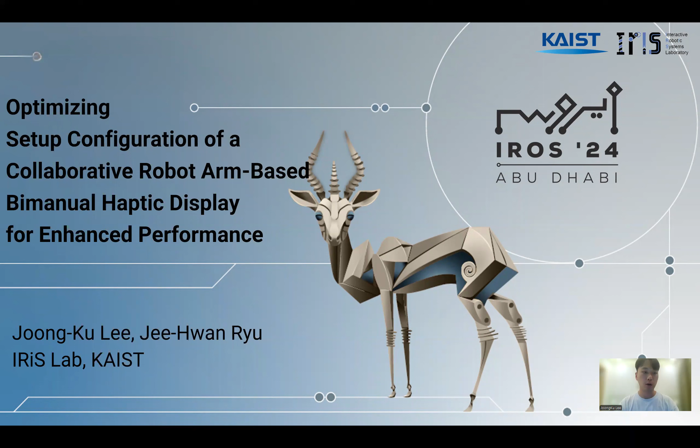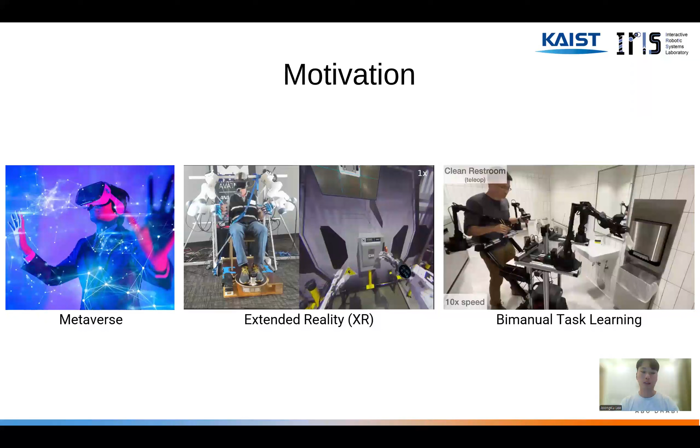Today, I will present a way to optimize setup configuration of a robot arm-based bimanual haptic display. Let me begin with the motivation of our research. The rapid advancement in metaverse and extended reality technologies have significantly increased the demand for sophisticated bimanual haptic displays, especially for applications like teleoperation, simulation, and learning of complex bimanual tasks.

However, despite this technological advancement, current commercial haptic displays exhibit several limitations to be utilized as a bimanual haptic display. Most of the commercial haptic displays are typically desktop systems with limited workspace and insufficient force and torque feedback range. Although there are some devices that can cover the entire human arm workspace, they often demand a nearly room-sized space with high cost and complexity of setup.

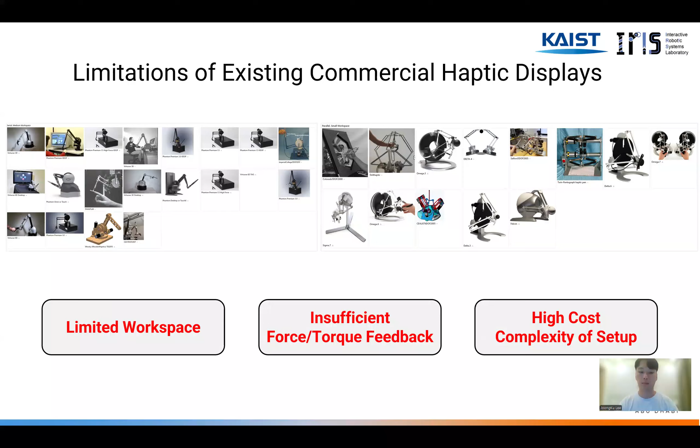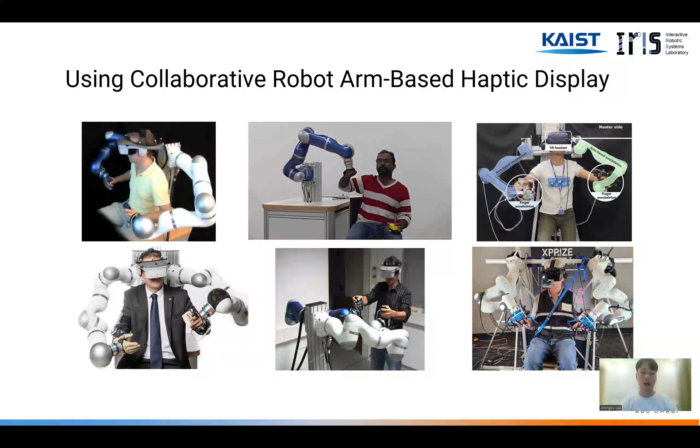In response to these limitations, previous researchers have explored the potential of using collaborative robot arms as a haptic display. However, the setup configuration for this robot arm is often determined empirically, relying heavily on trial and error or user intuition, rather than a systematic approach. As shown in this figure, the setup configuration can vary significantly, highlighting the need for a more structured and optimized solution. So several studies have attempted to address this challenge.

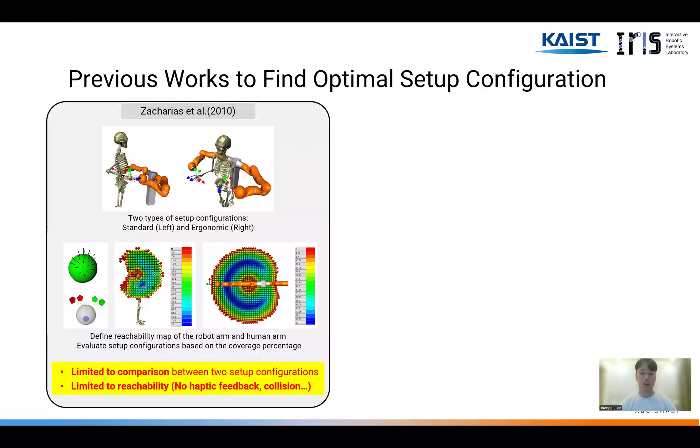Zacharias et al., for example, compared two configurations, a standard and an ergonomic setup, by defining reachability maps for both human and robot arms. However, their analysis was limited to just comparing two configurations and did not take into account critical factors such as haptic feedback or the potential for collision. Similarly, Lenz et al. focused on maximizing the overlap between human and robot arm workspace. But again, they did not account for haptic feedback performance or collision.

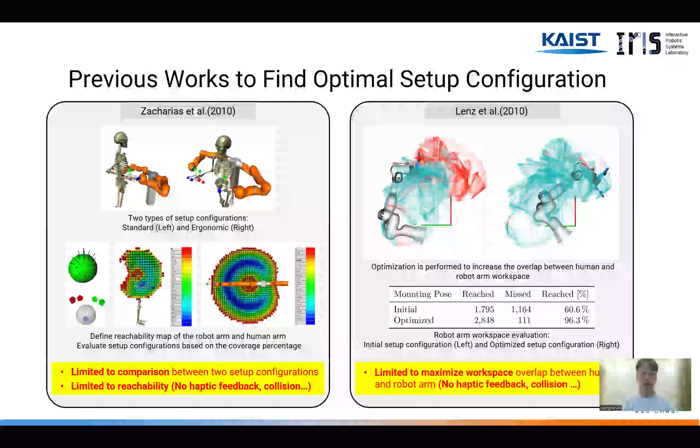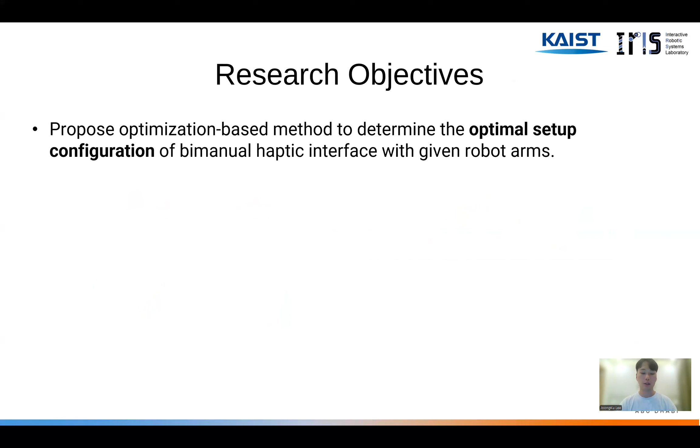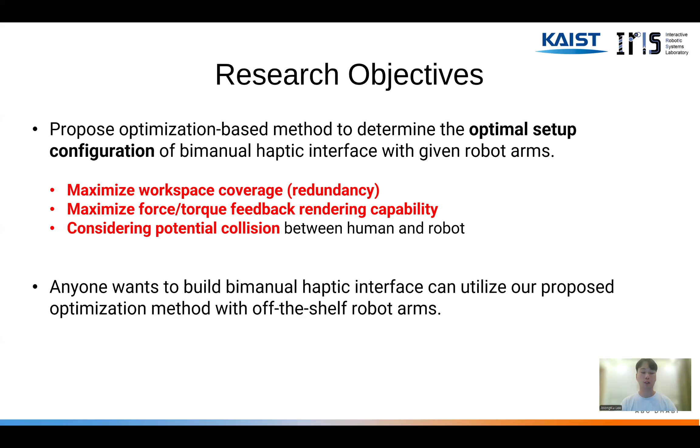So, our research aims to overcome previous studies' limitations by considering multiple factors that are essential for haptic interaction for determining the optimal setup configuration of the robot arms. This includes maximizing workspace coverage, redundancy if the robot arm is redundant, maximizing force and torque feedback rendering capability, and also considering potential collision between human and robot arm. Ultimately, we want this optimization method to be accessible and adaptable so that it can be applied to various off-the-shelf robot arms.

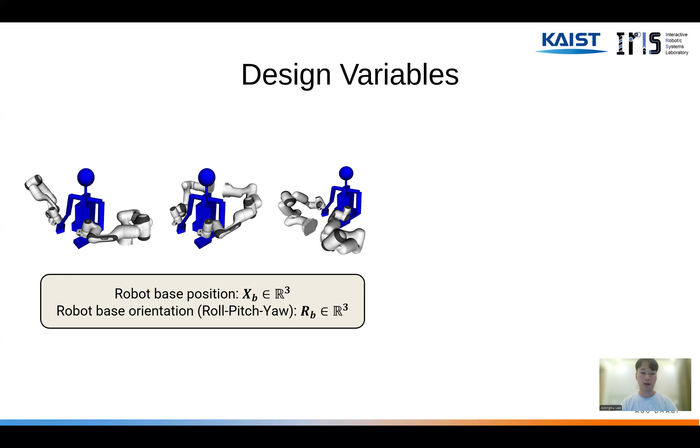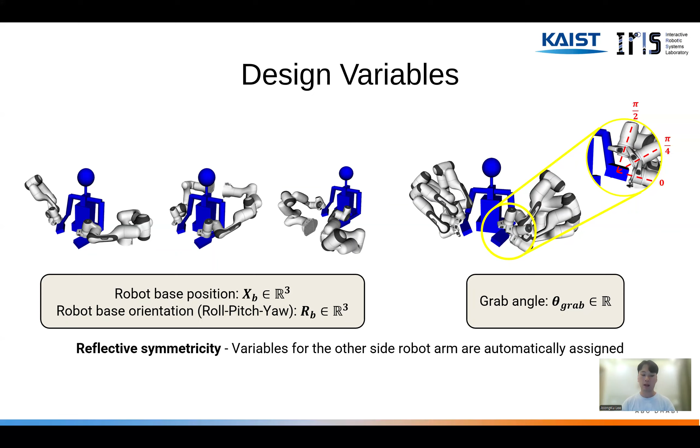Additionally, as depicted on the right side of the figure, various grab angles between the robot end effector and the human palm are possible. We assume that this grab angle also has a significant impact on the performance of the haptic display and included this grab angle as an additional design variable for our optimization. And to simplify the optimization, we assume reflective symmetry between the left and right robot arms, including their base positions and grab angles.

So, our optimization goal is set to find such a set of configurations that meets these four key requirements. First, maximizing workspace because we aim to cover the widest range of human reachable poses, allowing unrestricted manipulation movement without disturbing the operator. Second, ensuring dexterity because maintaining redundancy in the robot arm's movement is essential to support fluid, natural human movements.

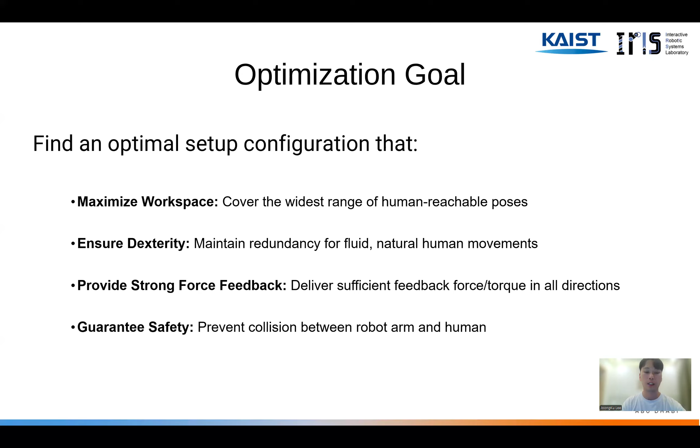Third, providing strong enough force feedback because the bimanual haptic display must deliver sufficient haptic feedback force and torque in all directions and under any circumstances to enable realistic haptic feedback. Last but not least, guaranteeing safety because it is essential to consider collision between the human and robot arms for optimization.

I will show you the overview of our optimization process. We begin with the workspace discretization, dividing the workspace into discrete positions and orientations to generate query poses. Next, we check the human arm workspace using inverse kinematics to determine the human reachable poses from these discretized query poses.

With this information, we move to the optimization phase, where we define a new set of configuration for the robot arms by adjusting the base positions, orientations, and grab angles. Then, we check the robot arm workspace to ensure the robot can reach to the human reachable poses.

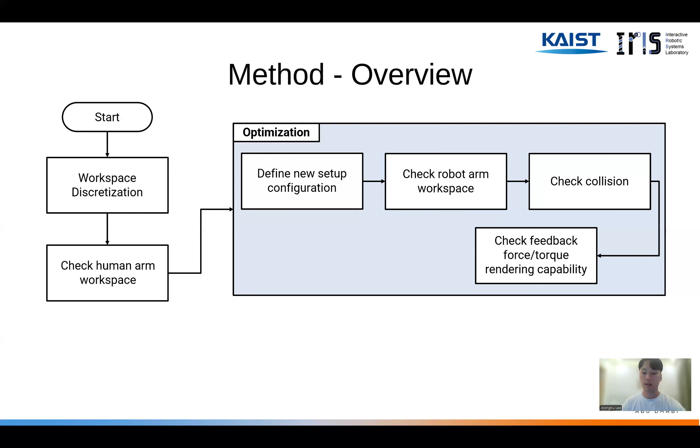We then perform collision checking to check the possible collision between the robot arms and the human operator. Afterward, we evaluate the feedback force and torque rendering capability to confirm the robot can deliver adequate haptic feedback. Finally, we calculate the objective function, balancing workspace coverage, redundancy, and haptic feedback performance.

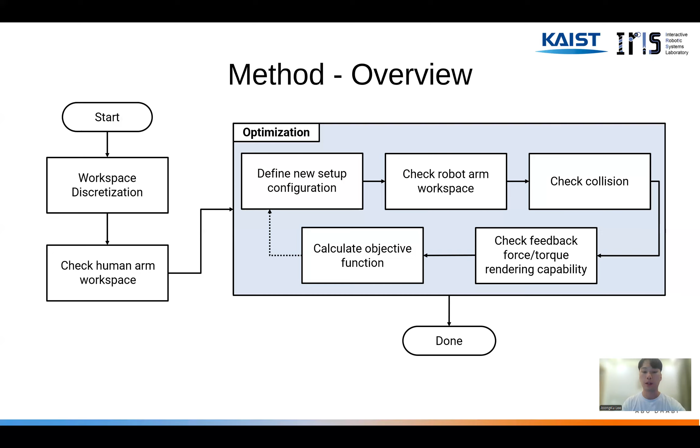This iterative process continues until we achieve an optimal configuration. The following sections will provide a detailed explanation of each individual step in the process. The first step is workspace discretization. Here, the workspace around the human operator is divided into discrete positions and orientations.

The position is discretized using a fixed step size of 0.1 meters, while the orientation is uniformly divided into 50 orientations for each position. This discretization allows us to generate a set of query poses that can represent the operator's potential reach.

Next, we assess the human arm workspace. For each query pose, we calculate inverse kinematic solutions to determine the human's reachable poses. Since the human arm is a redundant system, there can be multiple inverse kinematic solutions for each pose. Among these solutions, the most suitable human arm joint configuration for a given pose is determined by selecting the solution with the highest manipulability index.

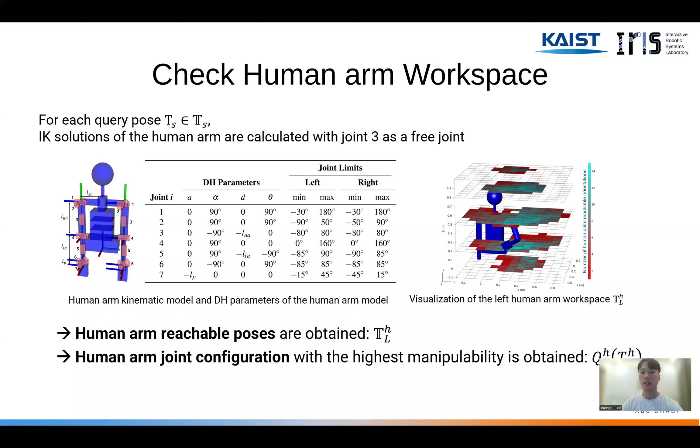Using this information, we proceed to optimization phase. At this stage, our algorithm first defines a new set of configuration for the robot arms by adjusting their base positions, orientations, and grab angles. The new set of configuration candidates are generated using a particle swarm optimization algorithm.

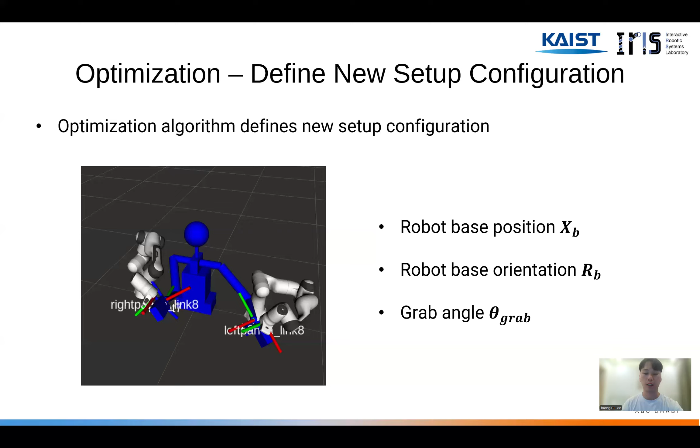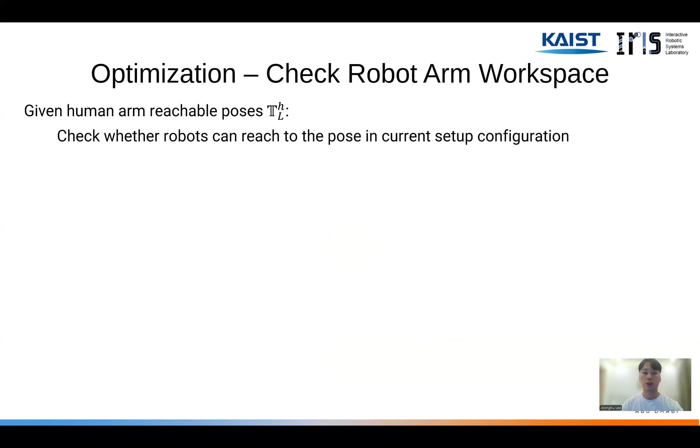Once a new set of configuration is defined, we move on to check whether the robot arms can reach the human's reachable poses. If redundancy exists in the robot arm, multiple inverse kinematic solutions may be available. However, if a specific human reachable pose cannot be reached by a robot arm, no inverse kinematic solution will be found for that pose.

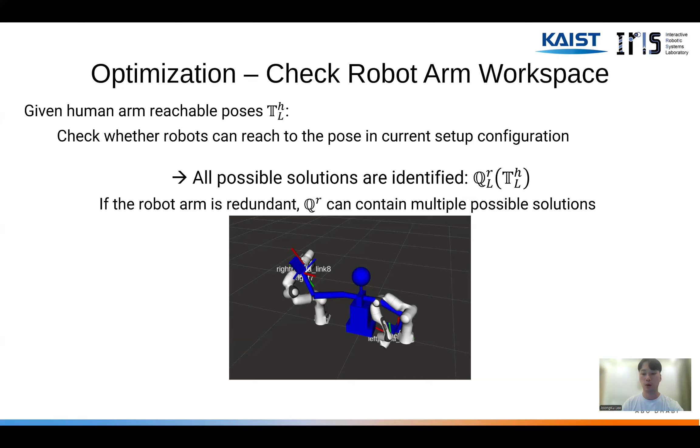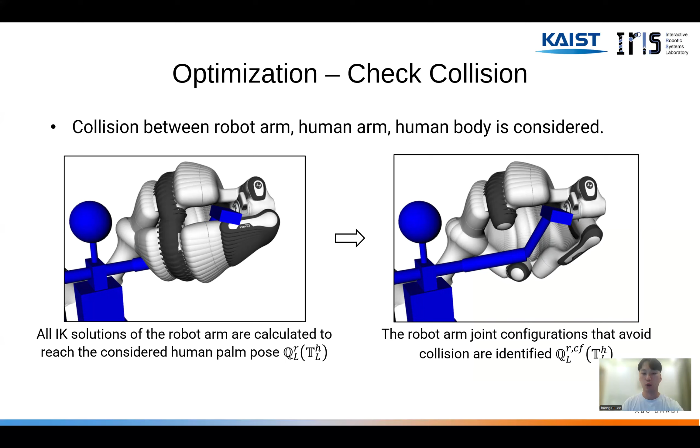An essential part of our optimization is ensuring safety. We perform collision checks between the robot arms and the human operator, including both the arms and body. As a result, the robot arm joint configurations that avoid potential collisions are identified.

Following the collision check, we evaluate the robot arm's feedback force and torque rendering capability. The robot arms must compensate for both gravity and the human arm's weight, with the remaining torque allocated for delivering haptic feedback. Using singular value decomposition, we analyze the maximum torque exertion direction and determine the maximum renderable force and torque for each pose.

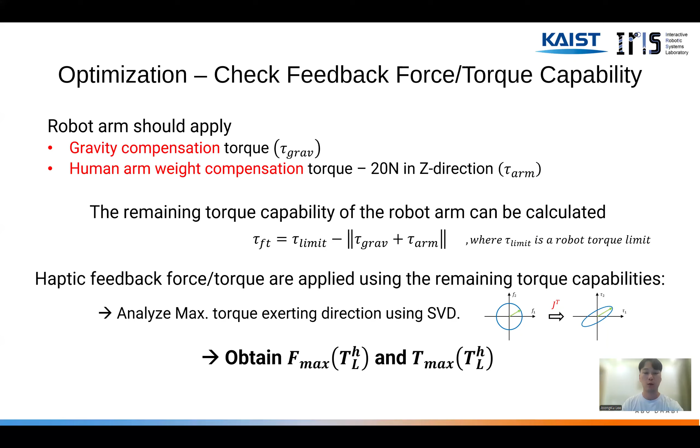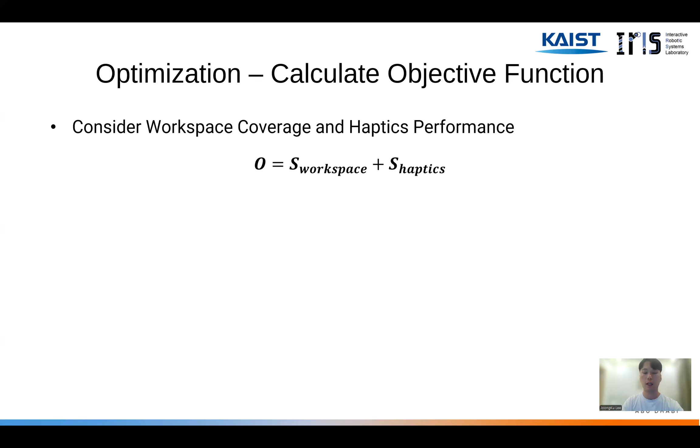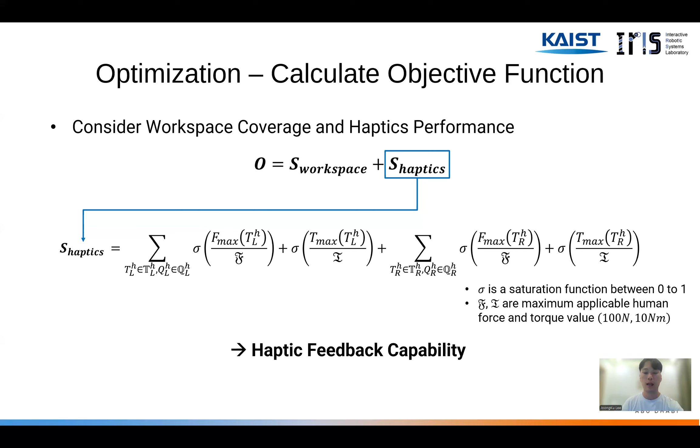Finally, we calculate the objective function, which is designed to balance both workspace coverage and haptic performance. The workspace-related component evaluates the robot arm's reachability and redundancy. On the other hand, the haptics-related component considers the renderable feedback force and torque. This ensures the optimized set of configuration achieves adequate haptic feedback performance and covers the widest range of human reachable poses.

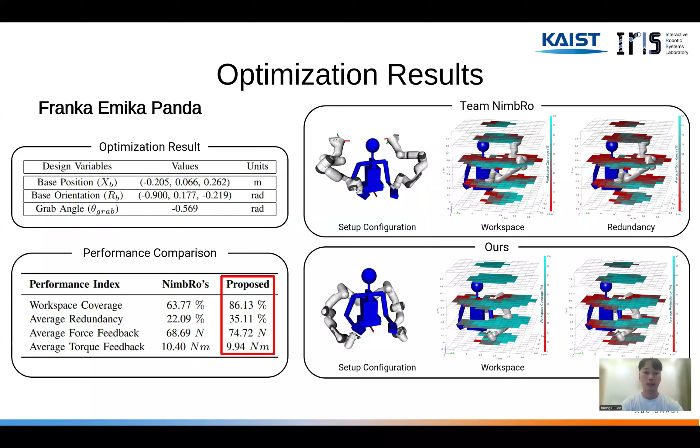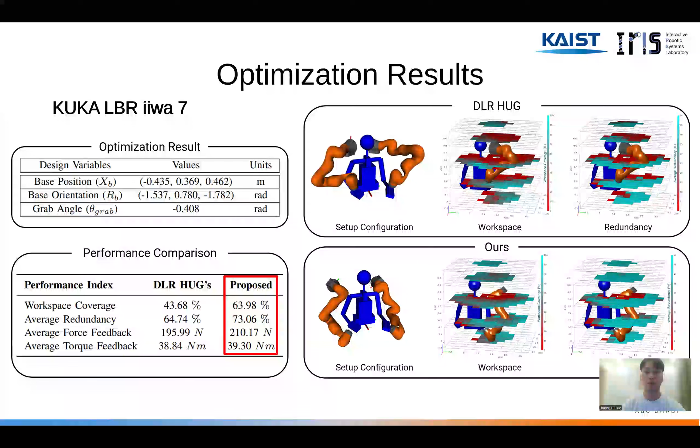Now, let's look at our results. We initially tested our optimization method using Franka Emika Panda robot arm. Compared to previous approaches of Team NimbRo, our method achieved superior performance in most of the performance indexes. In another experiment, using KUKA LBR iiwa 7 robot arm, our optimized set of configuration also outperformed the previously proposed DLR HUG configuration.

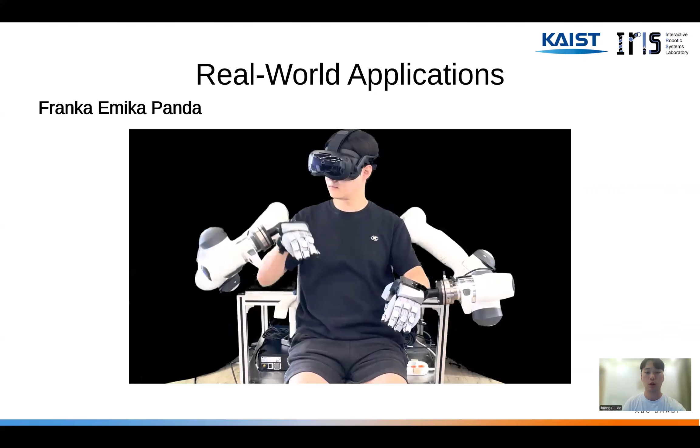Here are some demonstration videos showing the real-world application with Franka Emika Panda robot arm. Our bimanual haptic display covers a majority of the human workspace, ensuring maximized redundancy and providing sufficient force-torque feedback capability. Optimized bimanual haptic display can be effectively applied to teleoperation tasks with its dexterity and sophisticated force-torque feedback capability.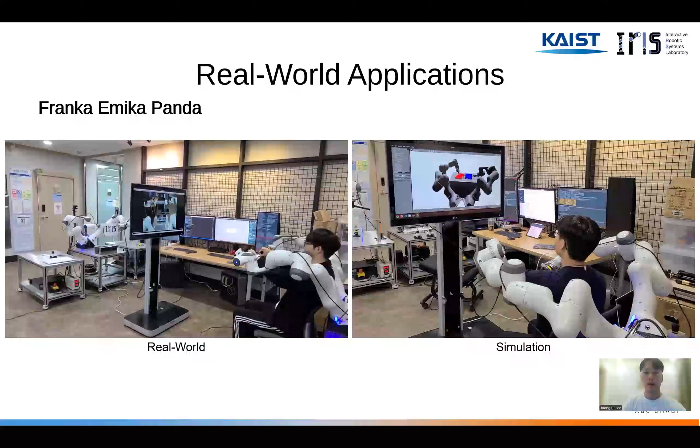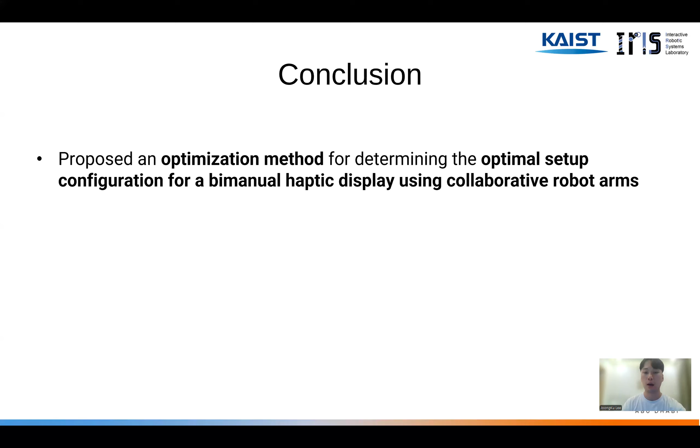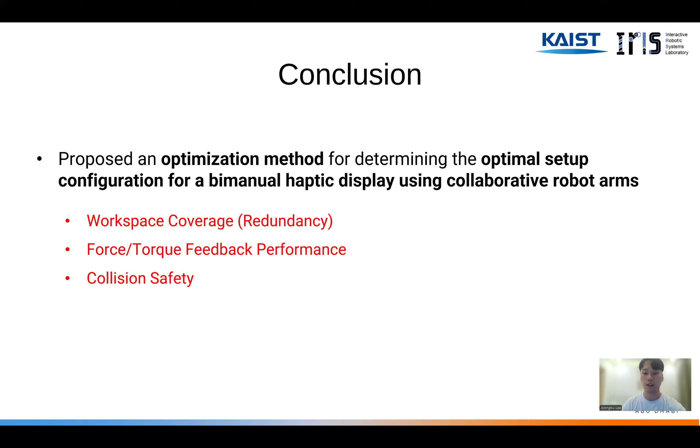In conclusion, we have developed an optimization method for determining the optimal setup configuration of a bimanual haptic interface using collaborative robot arms. Our approach maximizes workspace coverage and force-torque feedback performance while ensuring collision safety. Our code is publicly available on GitHub, and we hope that this work will contribute to the development of similar haptic interfaces.